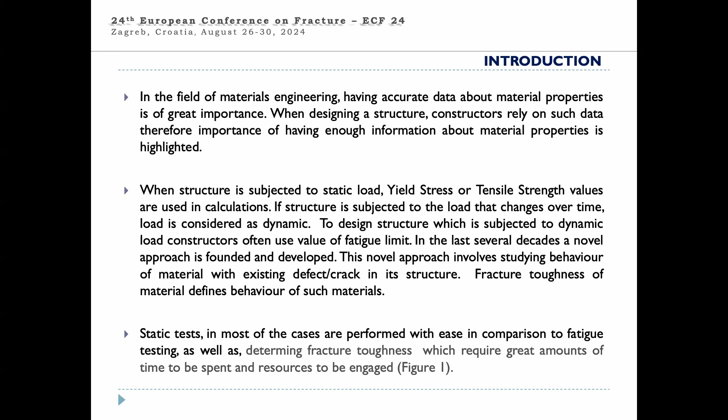In the last few decades, I would like to emphasize, a novel approach was developed in which material behavior is studied when the structure of the material has an initial defect. Of course, here I'm thinking about fracture mechanics and fracture toughness as a value which describes the behavior of material in certain conditions. I would also like to emphasize that static tests are done with ease in comparison to fatigue testing and fracture toughness testing.

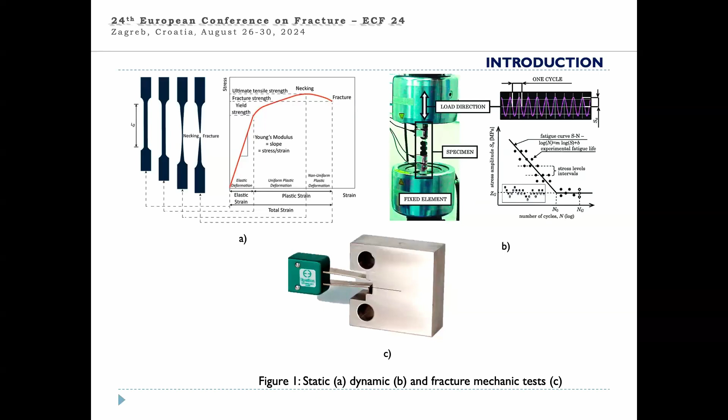And to do the last two tests, we need to spend a lot of time and we need to engage a lot of resources. To avoid that, in some cases, we can use the artificial neural network so that we can make some prediction of results based on, for example, chemical composition, as was done in this study. Of course, I assume that we all know that artificial neural networks were created as an attempt to simulate the thinking and conclusion-making process of a human brain.

A mathematical formulation of an artificial neuron can be made with equation number 1, y equals kx plus n, where y is the output value from a neuron, k is the weight coefficient, n is the bias value, and x is the sum of entry values. We also need to mention that application of artificial neural networks isn't possible without adequate training. Training is required to adjust weight and bias values so that we have as precise as possible output. To complete the training, we need to have existing data about the problem that we are solving. The data is further split into input and output sets and applied to the network.

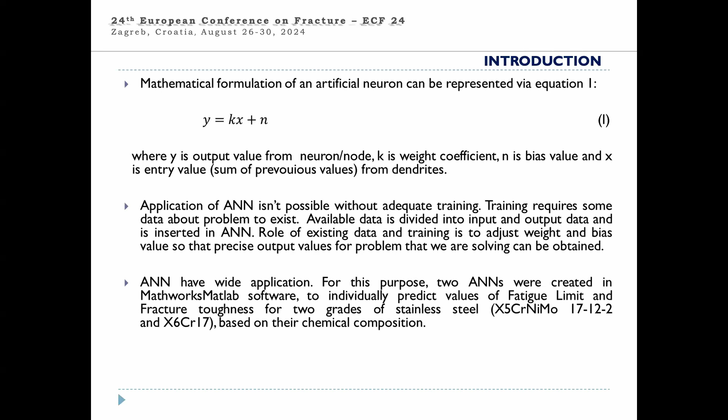For our purposes, we created 2 artificial neural networks in MathWorks MATLAB software, one to predict fatigue limit and one to predict fracture toughness of stainless steels. Both networks were created as feed-forward backpropagation networks, and both networks consisted of 3 layers: input, hidden, and output layers. The input set for training was common for both networks, and consisted of the chemical composition of 64 different stainless steel grades. Output training sets, we had 2 of them. One consisted of fatigue limit values, and the second consisted of fracture toughness of the same steels which we used to create the input data sets.

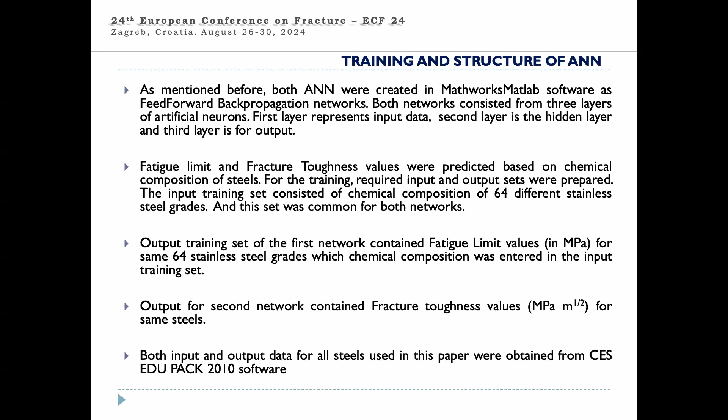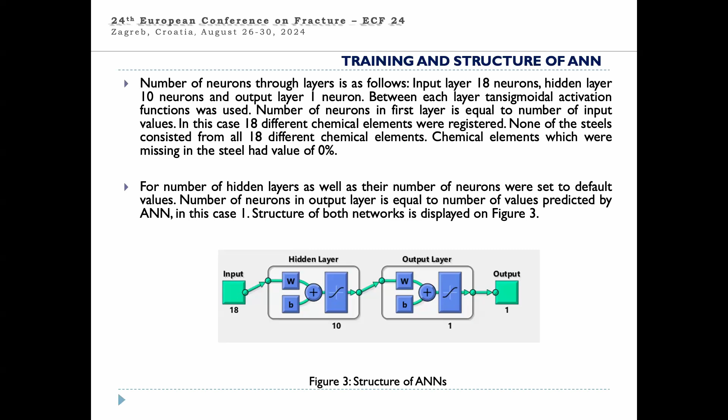Of course, I want to mention that all data used for creating data sets was found in the Cambridge Engineering Selector software, EduPack 2010. Here is displayed the structure of our artificial neural networks. I want to emphasize that here in the input layer, we have 18 neurons. And actually, we had 18 different chemical elements across the spectrum of 64 different stainless steel grades. Of course, none of the steels had all 18 chemical elements, but elements which were missing had the value of 0% in the input set.

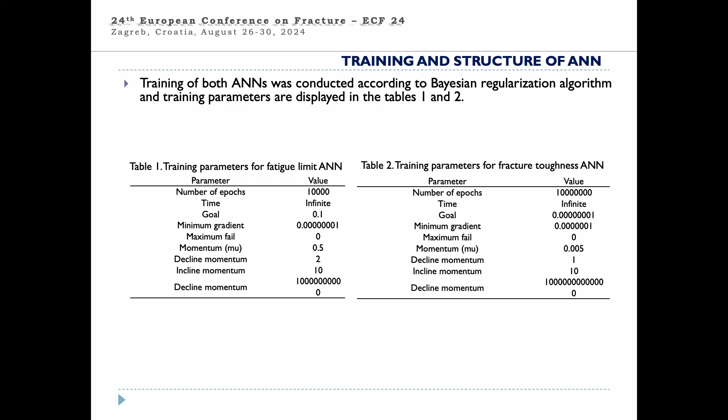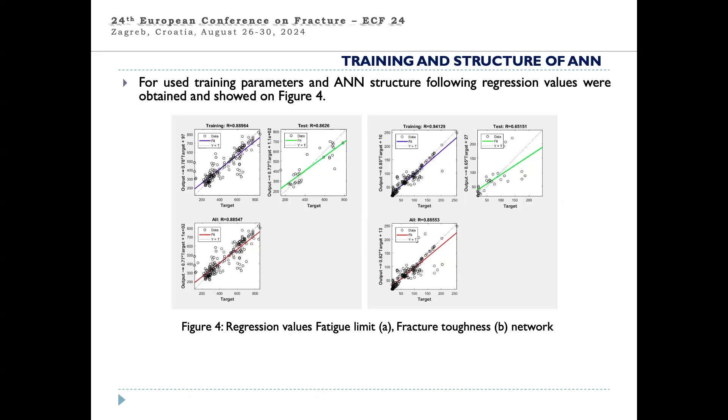Here we have the training parameters for both neural networks, and with those parameters and the structure which I displayed on the previous slide, we achieved sufficient regression values, approximately 88.5 in both cases. With those regression values, as we considered them satisfactory, we proceeded and entered the chemical composition of these two stainless steels, which weren't part of the training data sets. For the given trained network and the chemical composition of those steels, we obtained some values of fatigue limit and fracture toughness.

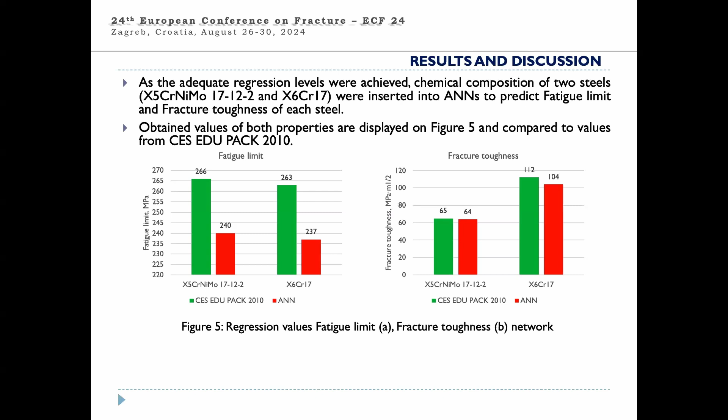Here, with the green columns, are displayed the values found in the CES EDU PACK, and with the red are displayed the values of fatigue limit obtained by the neural network. Here are displayed the results regarding fracture toughness. Comparing those two values obtained from the artificial neural networks and the CES EDU PACK, we calculated the error value, which in all cases was sub 10%.

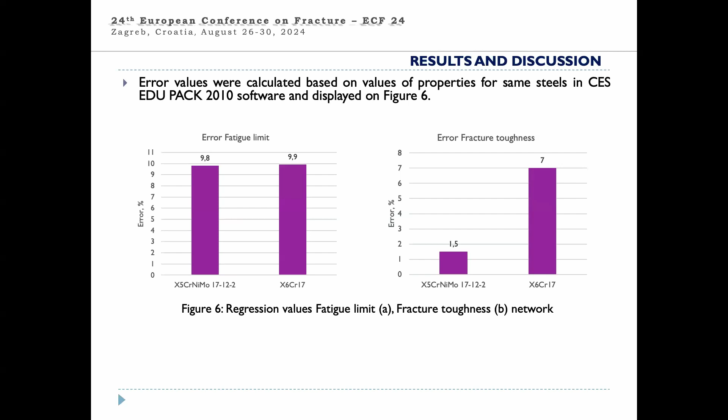And based on that, we made the conclusion that in some cases, when engineers are designing less responsible structures, we can use values which we obtained through artificial neural networks, but still, when we are designing responsible structures, we recommend doing the experimental testing.